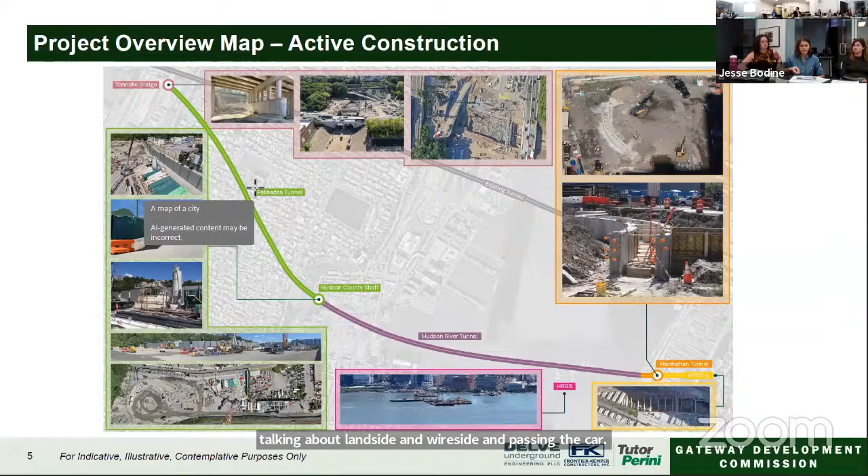The one we've been talking to you the most about is the Manhattan Tunnel Project. That's on block 675, goes across 12th Avenue and into Hudson River Park. The last time we were here was in April, and we were talking about landside and waterside impacts in the park. That's where we'll be focusing a lot, here and on 12th Avenue.

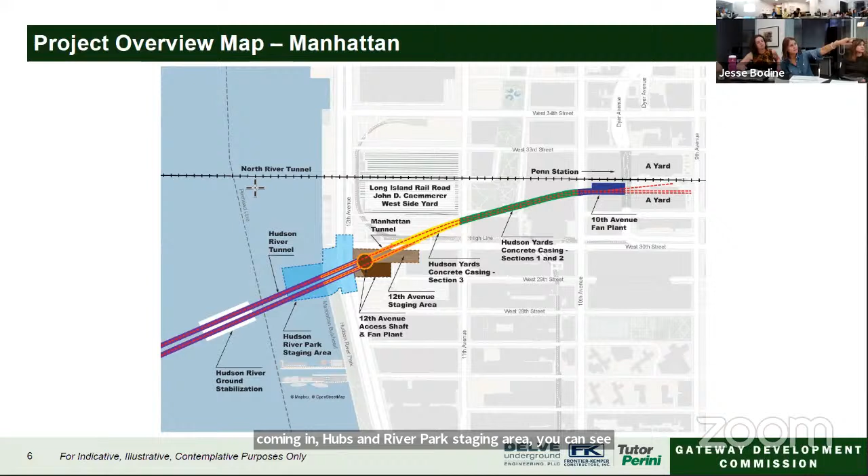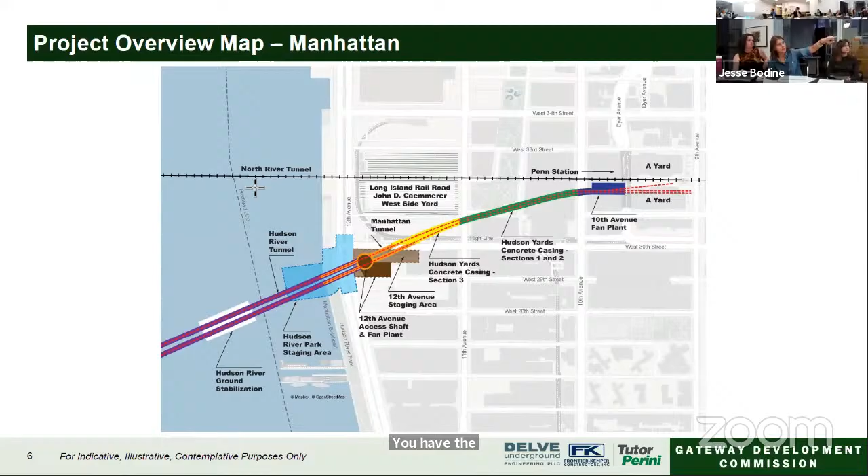This is your view of what is happening where you are. We have the Hudson River Ground Stabilization there in the water. You see the white box tracks coming in, the tunnels coming in, the Hudson River Park staging area. You can see the outline of where that is across 12th Avenue, block 675, the staging on 29th Street. You have the HYCC3 along 30th, and the Hudson Yards concrete casing, which will connect into Penn Station. Where the tunnels will go, and then 10th Avenue, the 10th Avenue fan plant — we'll have work going on there too.

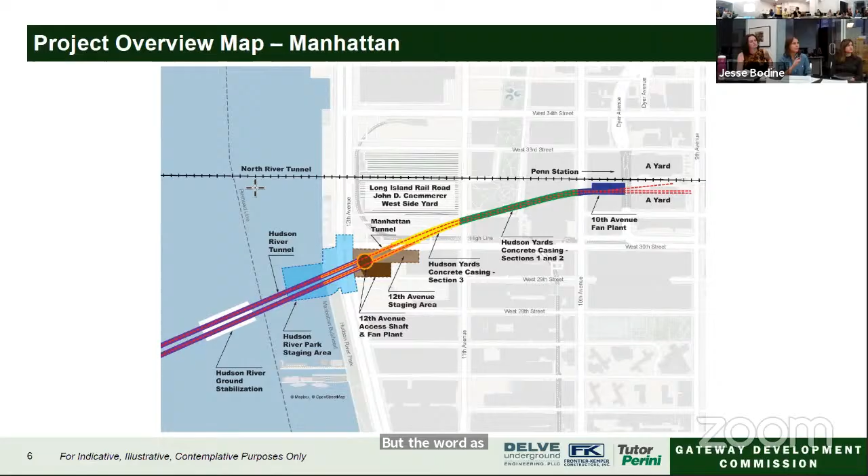A lot of you have been involved in this engagement in the past, but this gives a brief overview and timeline of where we've been discussing. We have done two 4F processes with you. This is when there are impacts within a park and the federal government wants us to do a process called 4F. We did that in 2024, and we did that again in 2025.

We've had lots of conversations with Leslie and Jesse and others about what might be some community benefits we could help build out. I think what we're expecting, Leslie, this year is maybe later on a letter from you guys asking us to run down, and then that'll be a really active conversation. I think that will take some time to get through, but we're committed to being as creative and as fun as possible.

I know you guys have a tremendous relationship with Noreen and Christine and everybody in Hudson River Park. I really cannot stress what an incredible stakeholder they have been with us. We have weekly meetings with them, sometimes more than once a week. They are incredibly generous with their expertise and time. They have been vital in providing feedback to us, and now to the contractor, about the real-life day-to-day of what that park is like. We all know how active that is.

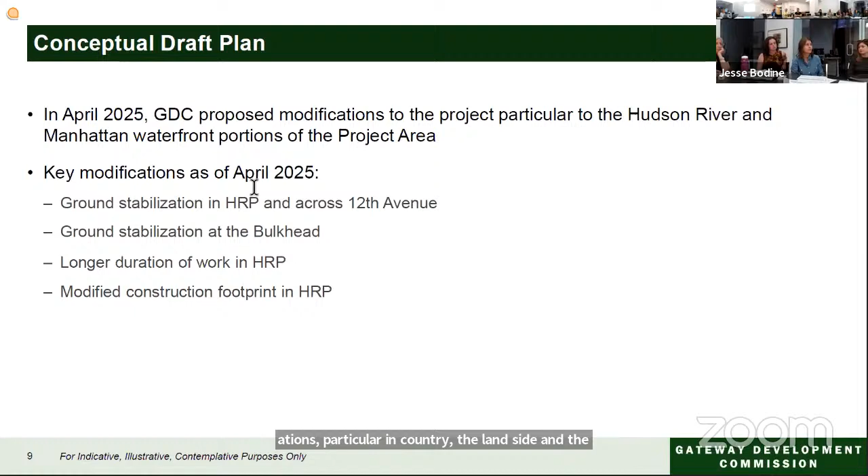What you saw in April 2025, we proposed modifications, particularly in Hudson River Park, the land side and the water side. Key modifications since April 2025 include the ground stabilization in Hudson River Park, in the park and across 12th Avenue, the ground stabilization at the bulkhead, longer duration of construction in the park, and the modified construction footprint, a bit more space. Next slide.

This is kind of the most extreme example in this slide that we went over with you in 2025. You have the bike and pedestrian path at the very edge, and you have the 12th Avenue lanes shifting sequentially. Andy is going to go into much more particulars of how some of this has changed in terms of width, spacing, and timing, but we wanted to remind you of the most extreme example we provided back in April, and we'll get into more of what has changed since then. Next slide.

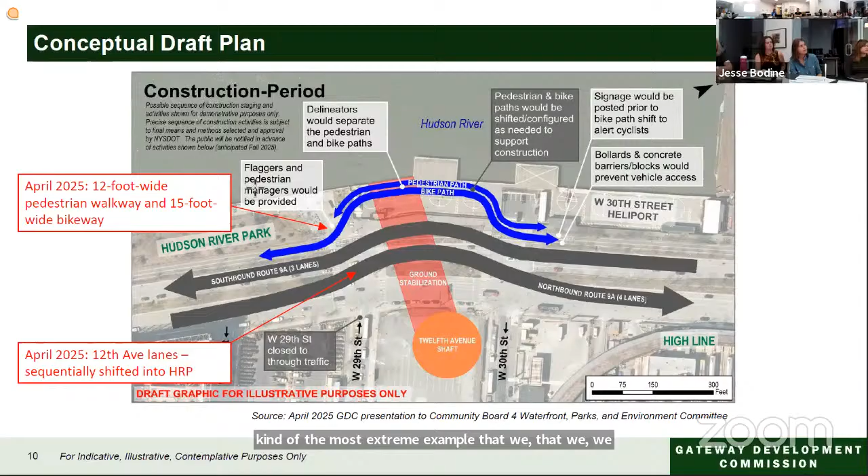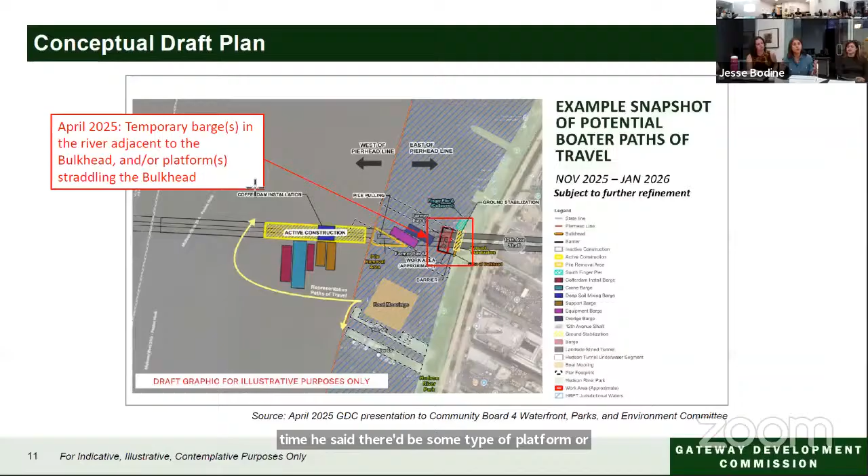Also, when it comes to the marine temporary structure that Guy is going to be talking about, at the time we said there'd be some type of platform or barge straddling the bulkhead. Now we actually have a conceptual plan, a bit more detail to show you what that will look like over the bulkhead. Next slide.

So I'm going to hand it off to Guy here. He's going to go through the marine temporary structure. Thank you for this time in the beginning, and we'll keep going.

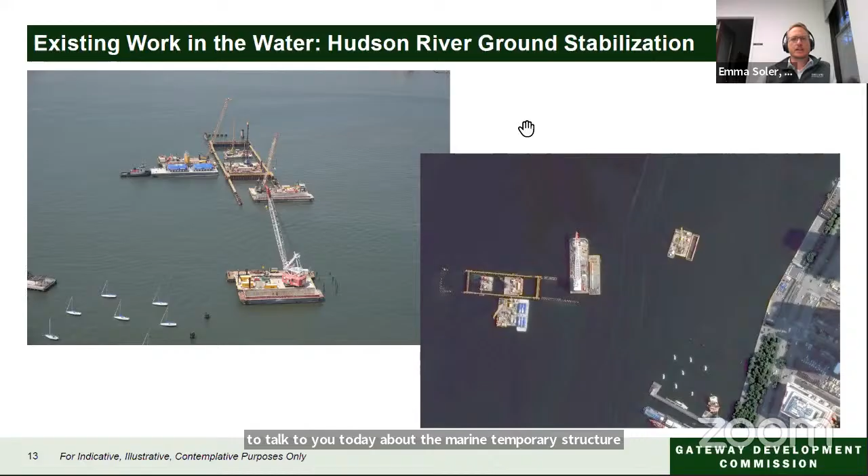Sure, thank you. Hello everyone, my name is Guy Shiba. I'm the Design Engineering Manager for Delve Underground, the designer for the design builder. I'm going to talk to you today about the marine temporary structure. If we can skip to the next slide, that will be great. Thank you for the great introduction, Emma, of the area.

GDC's contractor, which is us, as part of the design build, will install a marine temporary structure in order to facilitate the works. In this dashed blue rectangle, you can see in black the footprint of the marine temporary structure, how it will look, and we have some visualizations in the next slide.

This deck will allow for us to install pipes into the ground in order to freeze the ground under us and allow for tunneling. The area highlighted in cyan is the freeze area, the area in orange is the jet grouted area, and the green area is the shaft that we're going to excavate as part of the 12th Avenue shaft construction.

Construction has already started to pick up, and it will pick up more in Q3 and Q1 of 2026, that's the timeline. As we go into Q4 it will pick up more. The platform, the marine temporary structure, and the two chiller platforms on either side are hard to see here, you'll see it better in the next slide. They'll be in place until 2028 to allow for the operations of tunneling.

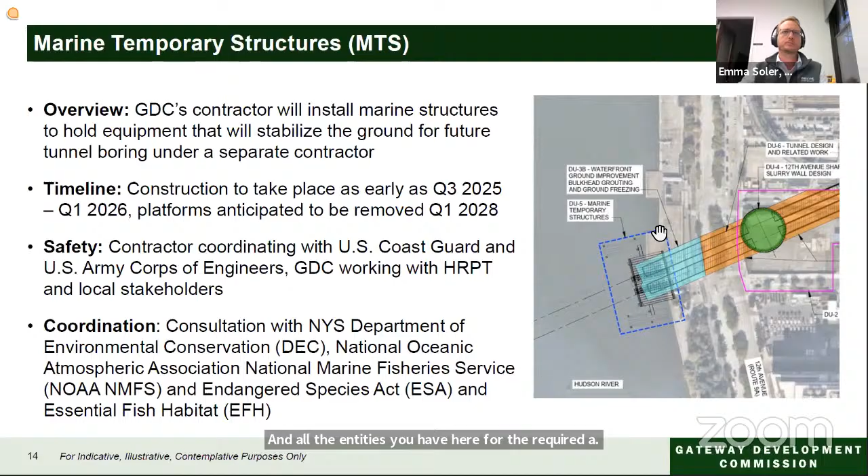Next slide please. This is a better footprint of a marine temporary structure and the two chiller platforms on either side, as well as the work area roughly in the park. Please note that these measurements are approximate and the dimensions are approximate.

The MTS, as we call it, the marine temporary structure, that's pretty well fixed. It's 120 feet, spanning, hovering over the bulkhead on one side, sitting on the ground, and on the other side sitting on what we call dolphins. You'll see it in the next slide.

And on either side we have chiller platforms that can range in dimensions as we know what will be available at the time we want to rent that equipment.

I've been told that because of July 4th, you can't rent too many marine vessels, but July 4th has passed and there's still a big problem to get marine vessels here in New York.

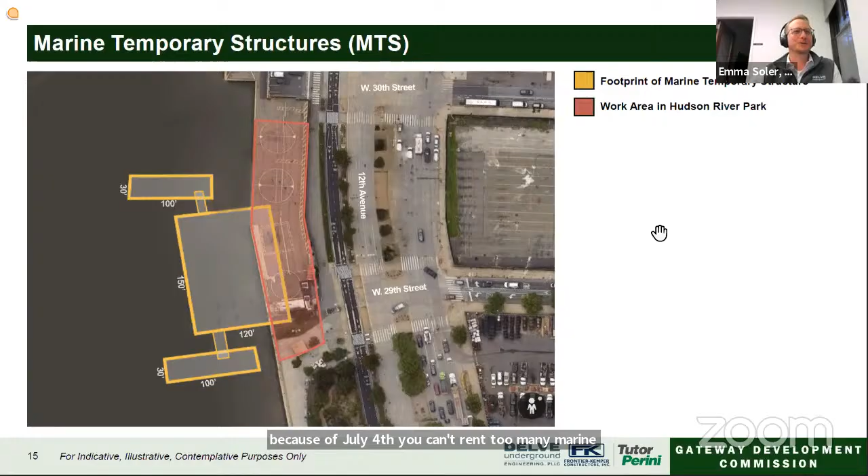Next slide please, I think this is what I've been building up for. This is a nice illustration of how it will look pretty much. You can see the dolphins on piles inside the water with a rail beam, one on the inshore and one over the river over the dolphins.

These two rail beams will both facilitate what we like to call the dance floor, which is the hatch pattern you see underneath. That will support all the freeze pipes and allow for all the operations to take place. On top of that, as an upper level, we'll have two movable bridges on which drill rigs will sit to facilitate drilling of the pipes into the ground, under the Hudson, and inside the mudline, into the clay, in order to freeze that volume in which we need to tunnel through.

On either side you can see the chiller barges, the chiller platforms. They'll be sitting there in place with gangways connecting them to the dance floor. This is where we'll locate the chillers, and we'll have manifolds running, connecting all of the freeze pipes and through the gangways going into the chiller barges, with brine circulating as a closed system in order to freeze the ground. So we don't actively insert anything into the ground other than the pipes themselves. They're a closed contained system in which the brine circulates, and that basically extracts the heat from the ground into the brine, which is then circulated and chilled back.

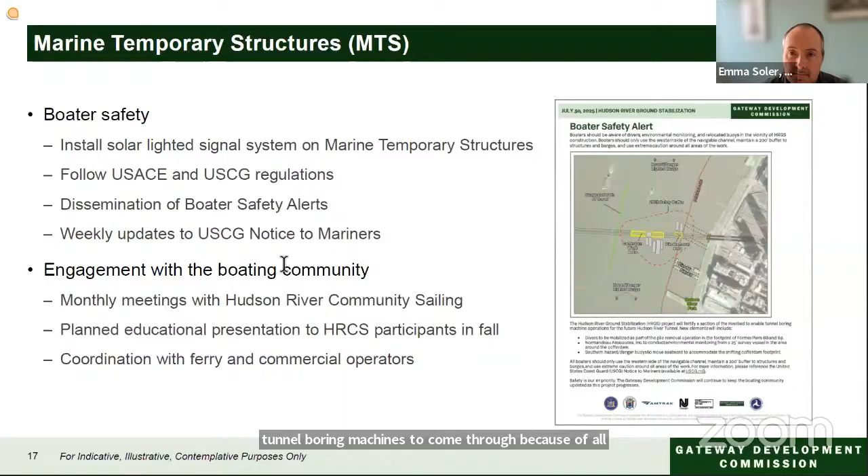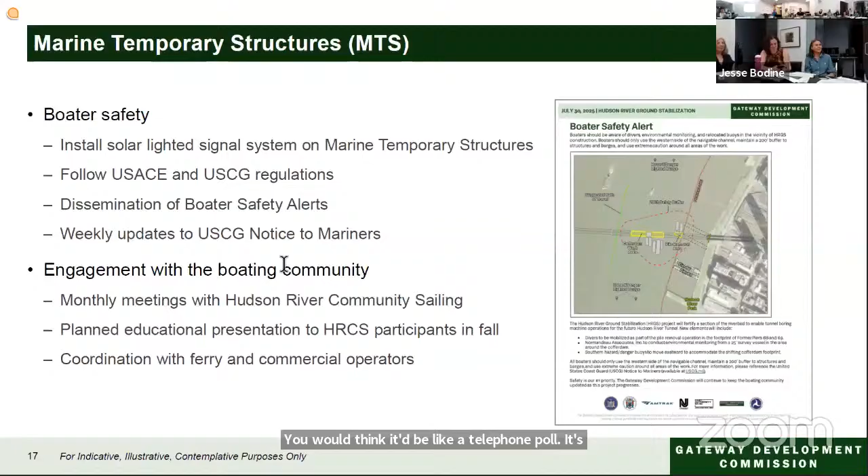We saw a pile getting pulled, like they pulled a pile that's been in there forever, and you just couldn't even believe it. It's not like you often see that, piles being pulled, and it was huge, it came out in a 25 foot piece, tall. And you just think, you would think it'd be like a telephone pole. It's really like a tree with the branches cut off, and it starts out at about 11 inches at the top, and then narrows down to about 6 to 4 inches.

So it's definitely not what you would think of a modern pier, obviously, because it was built in the 1800s. But I was just surprised that it doesn't fall apart, right? And they were saying there's no oxygen down there, so it will stay together.

I'm sorry, you had your hand up. Yeah, this is a long way from Penn Station, but is all of this work compatible with through running down the line? I think Amtrak at Penn Station is best to speak to that. We are a bi-state agency that was created to build our tunnel, and those discussions will continue, but we're focused on the packages that we have under our purview to do. But as far as whether it would be compatible with through running?

Our project is designed to work with and interact with Penn Station. As Rebecca said, through-running, Penn Station reconstruction, expansion—any of those things—are not part of our legislation. But we're making sure we can connect to Penn Station and operate in that environment. Whatever happens within Penn Station is for others to decide. What we're doing is providing this resiliency project, so whatever is decided with Penn Station, the new tunnel and the rehabbed North River Tunnel will be able to serve the public. I hope so—maybe a lot of TBD there.

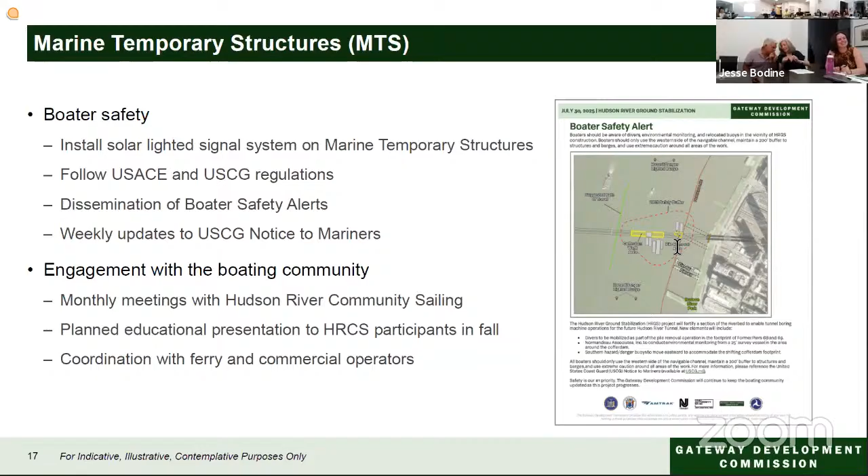I'm going to jump in and speak about the bike lane and pedestrian paths. Hey, Andy, could you introduce yourself real quick, just as a reminder of who you are? That's Emma Soler—yeah, we don't have three Emma Solers. This is the real one. I was going to introduce myself as Emma Soler. Okay, gosh, all right, you called my bluff.

No, I'm Andy Mankey. I'm with Delve Underground. We're the lead designer for the design-build team working with Frontier Kemper, and I'm the civil engineer on the job, so definitely intimately involved with a lot of the topics we're going to talk about next in terms of the bike-ped lane shifts and the roadway shifts.

I'm going to start with the ped and bike lane adjustments. Up on the screen is a series of stages of how we plan to implement them. We'll go into details in the next few slides, but this gives context of when these stages will be implemented. Stage 1 is a pretty minimal impact, but Stage 2 is the first time we have a bigger impact, and that's currently targeted for Q1.

Getting out and talking with folks a little more and getting input allows us to take that input and implement it. In addition to speaking to this group tonight, we've been coordinating with a number of other stakeholders on the screen, including both the DOTs as well as HRPT, providing input along the way, including lessons learned from agencies dealing with detours in this area over the years. The final bullet is about the trees—there's a pretty short stint of tree removal along this corridor, both within the center median of 12th and the portion of the bikeway that aligns 12th.

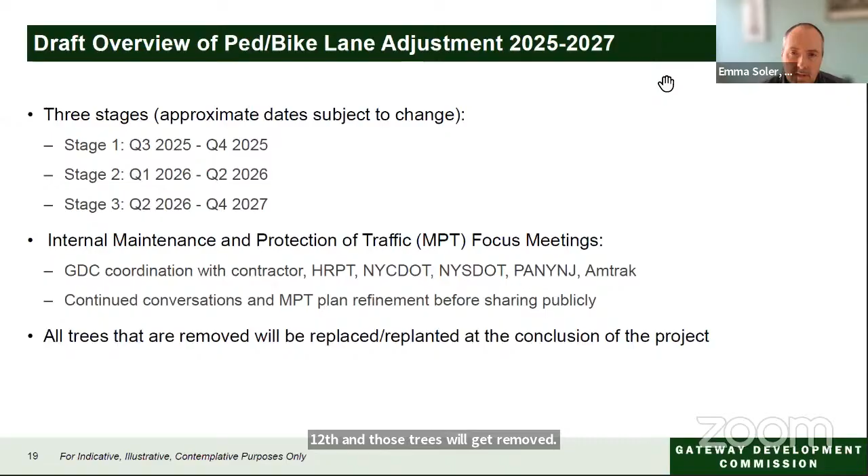Next slide. If I can ask—I know we talked about this, and we wrote this in our letter—about just access points and length of time. Has it changed since then, or is this pretty much the same plan? Are there any big changes here we should know about? The plan has changed.

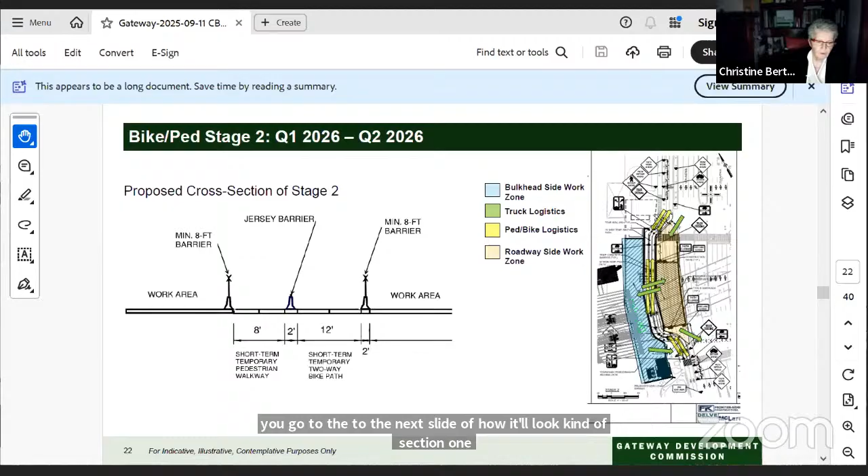The one thing I'd point out is that with a lot of the turns and things like that, we'll have delineators. If you go to the next slide of how it'll look section-wise... can you stay on that for one second? Go back to the other one. So what is happening in this stripe section to the right?

That is the limits of the ground improvement zone. So you're talking about within that roadway side work, the beige color where it's more striped - yes, that's where they're going to have drill rigs installing freeze pipes into the ground.

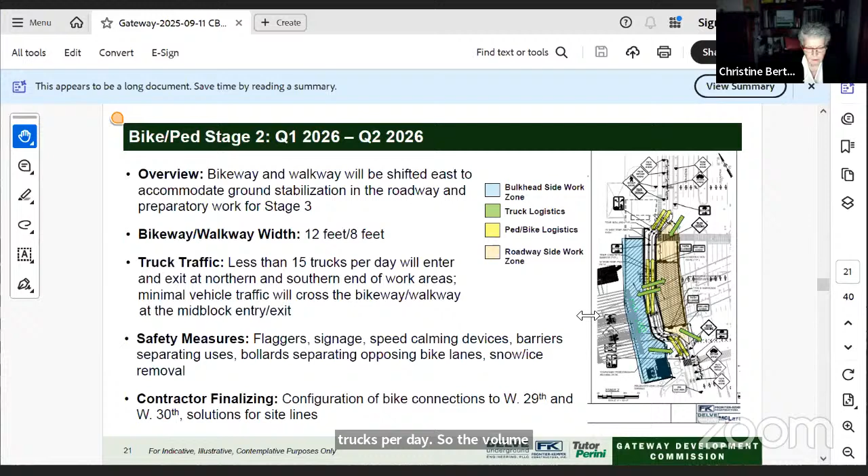I see. And then the volume - you say less than 15 trucks per day. So the volume, that includes the back and forth in the middle? Yeah, so one of the nice things is that because of the marine temporary structure out there, there'll be a crane on that as well as a crane on the land side, the blue area. We're going to look to barge a lot of equipment in, and that's going to reduce a lot of the truck traffic going on in this area.

So what is the volume that is going to go back and forth between the two zones? Oh, I'm sorry - the back and forth between the two zones would be 2 to 3 trucks every other night type thing, in the blue zone. If you go back a step, so everybody can get the idea - when you're in stage 1, you're installing a lot of the pipes in that zone during that period of time, and you ultimately create a bifurcated site a little bit, because you've got all these freeze pipes that come above grade.

So it's more for just the occasional pickup truck to go over and pick something up or move something around - things like that. It's a very low frequency, but I want to make sure people are aware of it so that when they hear about it or there are concerns about it, we can take those into consideration as we set up our crossing.

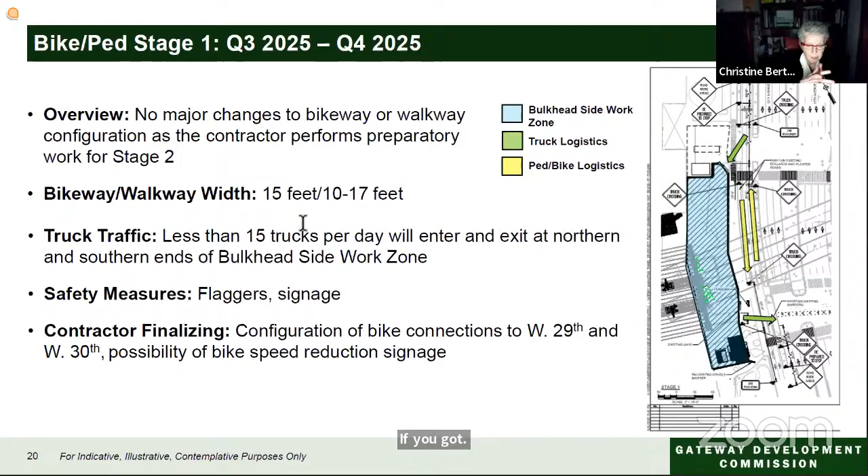So we can go back to stage 2, going forward a slide. You said the beige is going to be in the roadway, meaning it's going to go all the way to the median. Yeah, so this area is just for the freeze pipe and how we move peds and bikes around. The roadway part will be the next set of slides, and I'll show you how we dance through the roadway portion.

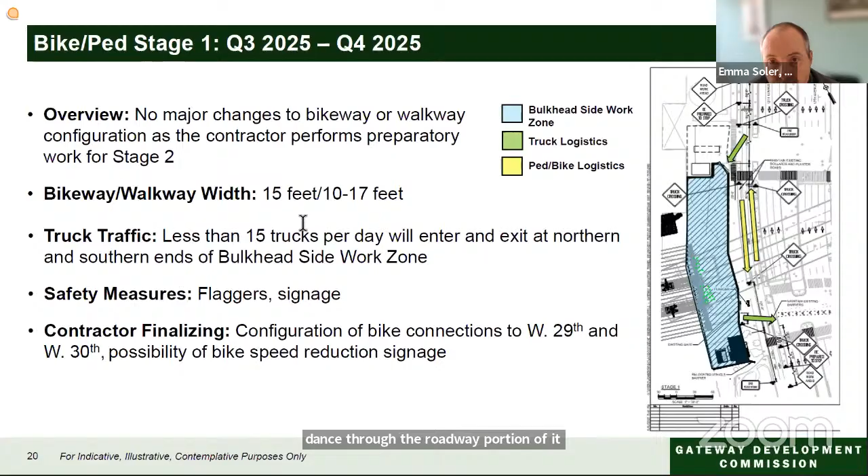Okay, go one more slide. Here's the general cross section of what the bike and ped lane would look like during this short-term duration. We'll have a Jersey barrier to separate the peds and cyclists, and through feedback with our partners, there'll be flex stick delineators between the two bike lanes. We understand there's a lot of bad biking behavior with people wanting to pass slow cyclists, so in these curved areas we're going to set up delineators on tight spacing to mitigate that, as well as appropriate signage.

That's the general high-level concept for stage 2. The roadway side work zone, at that point, could be right up against that work zone or out in the middle of the street. It's completely independent of these shifts in terms of they're not interlinked.

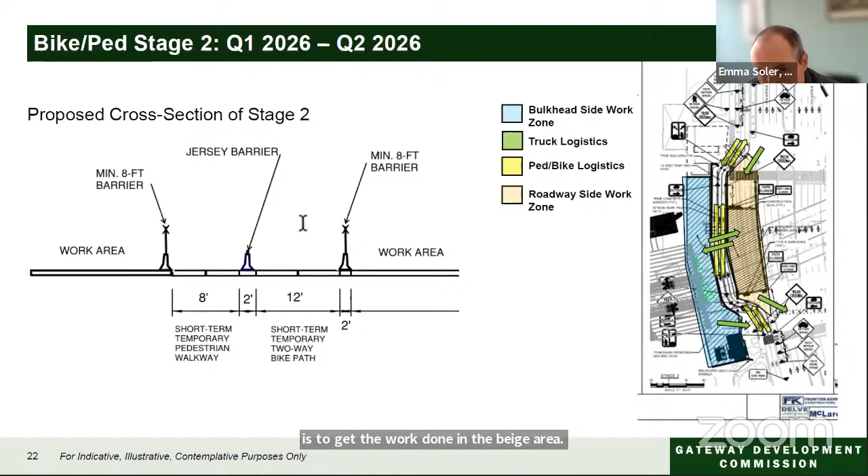The reason this is short term is the goal is to get the work done in the beige area. If you go to the next slide, stage 3 is the long-term condition we'd implement for the duration of the freezing and tunneling. The idea is we want to get our peds and cyclists back into their original corridor, and that's what we're able to accomplish with the shorter duration tight turn sweeps, getting them back to this condition.

The big hang up is that due to the freeze pipes that have to be installed over the tunnel to create the competent material for our tunnel to go through, the freeze pipes have to extend above grade and have a manifold and brine pipes that interconnect to run the solution down to freeze the ground. To do that, you can't put pedestrians and bikes at grade, so there's a slight ramp that goes up approximately 2 feet, 24 inches, over about 40 feet so we can remain ADA compliant. That's done on either side of the ground improvement area and comes back down to grade on either side.

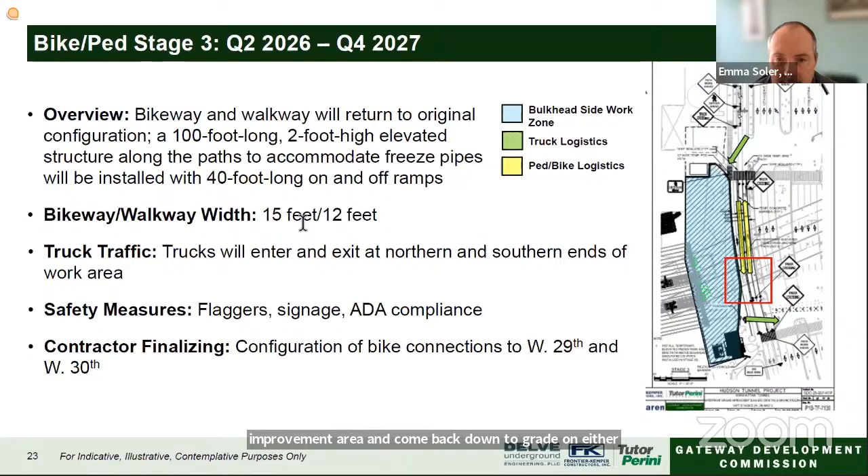If you go to the next slide, it gives you a general idea. This is the 24-inch lift, which is the maximum height, right over those freeze pipes. I did my best with my Bluebeam sketching, but the red lines are the freeze pipes. The curb along 12th doesn't get disturbed and will be there throughout the life of the project - it's a 20-inch high curb. So that gives you some general context.

At the bottom of this figure, this shows a 6-foot high cyclist going over this 2-foot high ramp, just to give an idea. You've got 40 feet up, then flat for 100 feet over the freeze zone where the pipes are, and 40 feet back down on the other side. That is the bike and pedestrian shifts. I can stop and take questions now, or we could keep going to the roadway shifts.

We have some questions in the room, if that's okay. Yeah, fire away. Wouldn't you need kind of a longer ramp approach to maintain a 5% pitch so it's not

A ramp for people in wheelchairs? Yeah, so it's laid out so that it's like 4.75, and so at 5% you can't go more than 24 inches. Unless, once you go above 24 inches, you need a stop, like a landing, for them to rest to then go additional height. And so that's why the 2 feet over the 40 feet gives you that 5%. So the math, if you went right with 5%, you'd just need 40 feet, but it'll be a little bit longer just because I never trust everybody to build it perfectly.

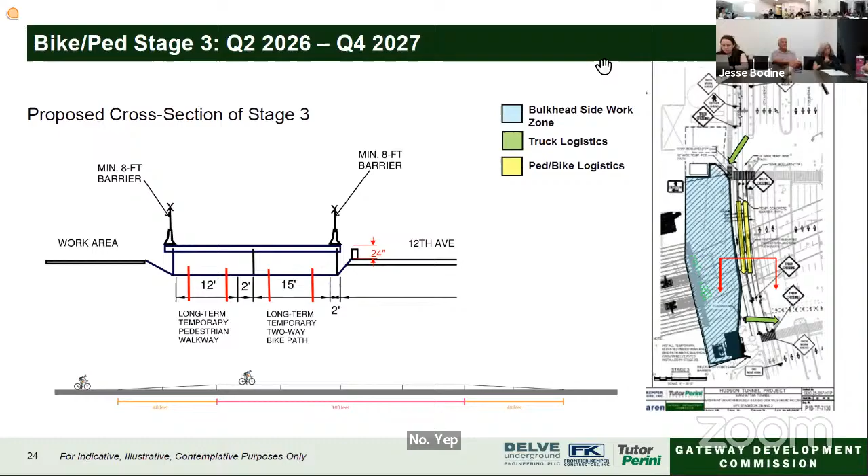Great, I think you can move on. Okay, great, yeah, let's get into the next phase.

Before we get to that, I want to take one moment on how we get the rebuilt bike path to our final condition. So if you can imagine, when we're working in this stage 3, eventually we'll need to reestablish the bike path, and what we'll do is basically shift the bike path in a similar manner to what we did in stage 2 to create what would be stage 4.

We would then be able to go into the existing bike area, restore that whole condition, and turn it back over to the public. They would have their permanent condition. Then we'd go to what would be stage 5, and we'd clean up the rest of the heliport and be able to give everybody back basically what they started with.

That's the goal. That's been a question people have asked - how are you going to get it rebuilt? So wanted to touch on that one. All right, next one.

All right, so this is the 12th Avenue lane shifts. Go to the next slide.

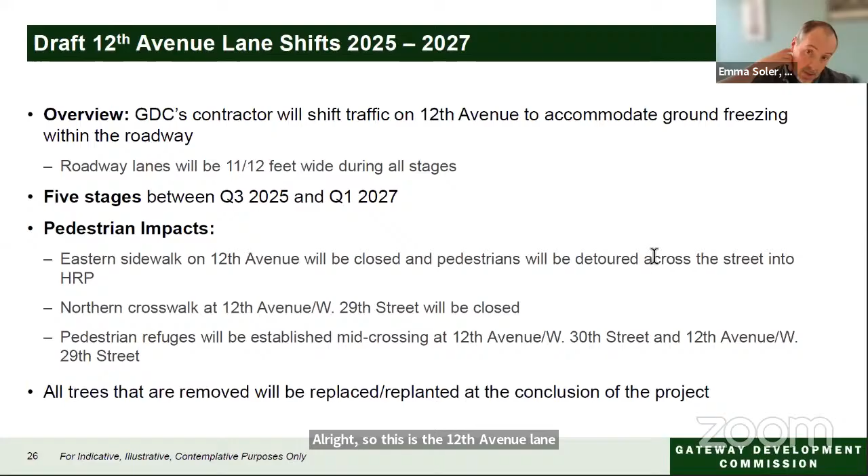So basically, over the next couple of years - we talked a little bit about the parks because that's where the ground freezing is going on. That has unique challenges with ground improvement, using jet grout, which needs to be installed from the surface. It's basically jetted into the ground to improve the ground down there, and to do that, you need to be as best you can vertically over the work zone.

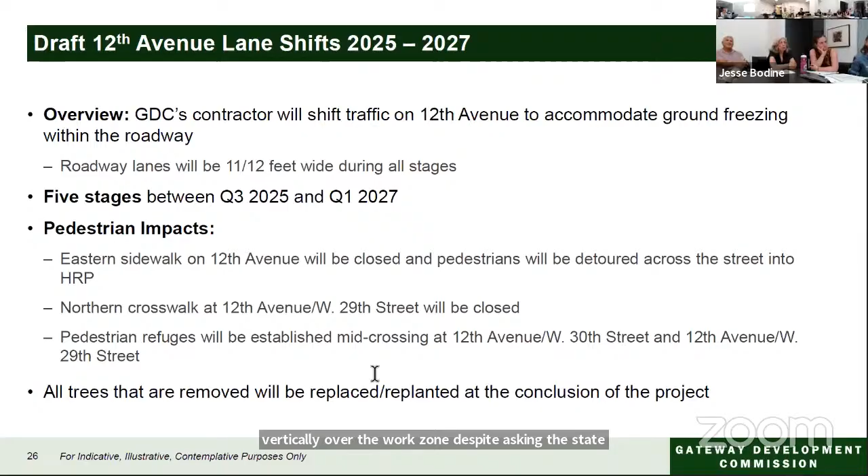Despite asking the state if I could close down all 7 lanes of traffic, they said no. I was a little disappointed in that response, but as a result, if you've been in the area recently, we're working on removing the center median, and the center median removal allows us to create what my Minnesotan in me loves to call the ice rink.

So affectionately, you're just from curb to curb - you've got a flat asphalt or concrete driving surface, depending on where the work zones are, and to get across the lanes, you'll move those lanes around to create the work zones.

But as a result, we are going to be closing the eastern sidewalk on 12th that runs along the shaft. In addition, the northern crosswalk that crosses from along 29th that crosses 12th.

The northern sidewalk isn't that big of a deal since we've already closed that sidewalk going back to 29th. For those familiar with that, it's already been implemented out there, so this is just a continuation of that closed sidewalk. But for the eastern one, we did studies to ensure the pedestrian volumes were minimal, which they are.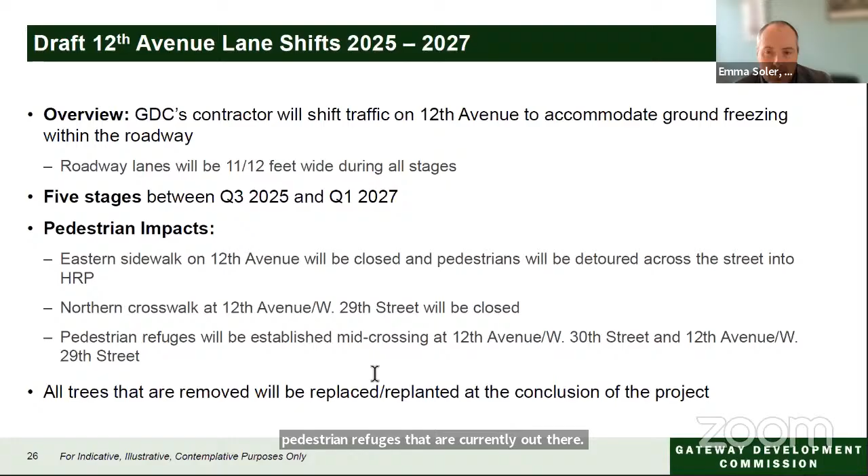In theory, it's not that large of an impact, but I'm happy to hear from folks. The pedestrian refuges currently out there will be maintained as we bounce around. I mentioned the trees earlier. So with that, we can jump to stage 1 to give you a visual depiction of how this will look. Next slide, please.

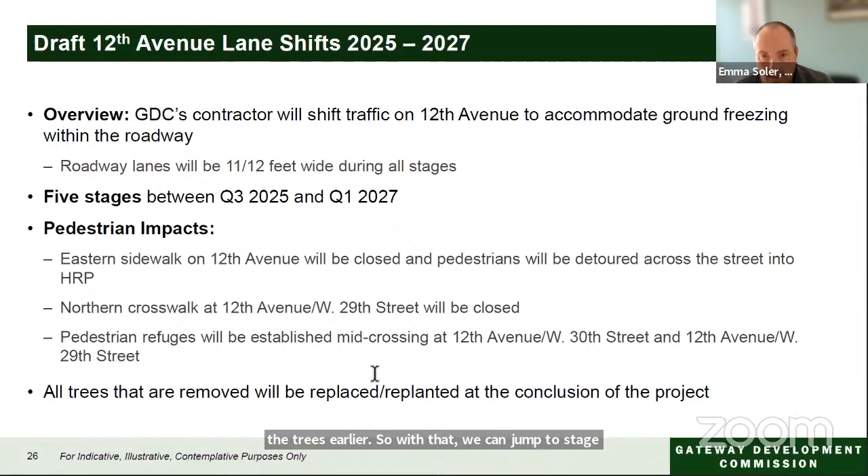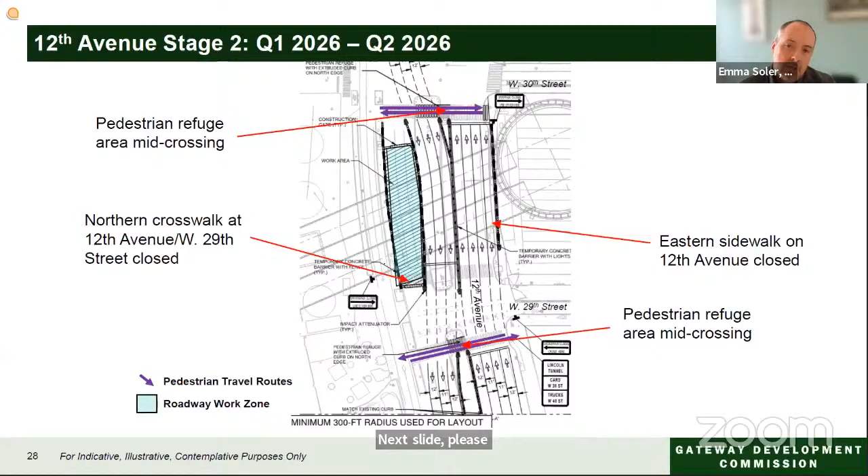When we jump to the other side of the street, we shove everything back to the east and reestablish the 4 lanes northbound and 3 lanes southbound.

I'm losing my voice, I need my water. I ran out, sorry.

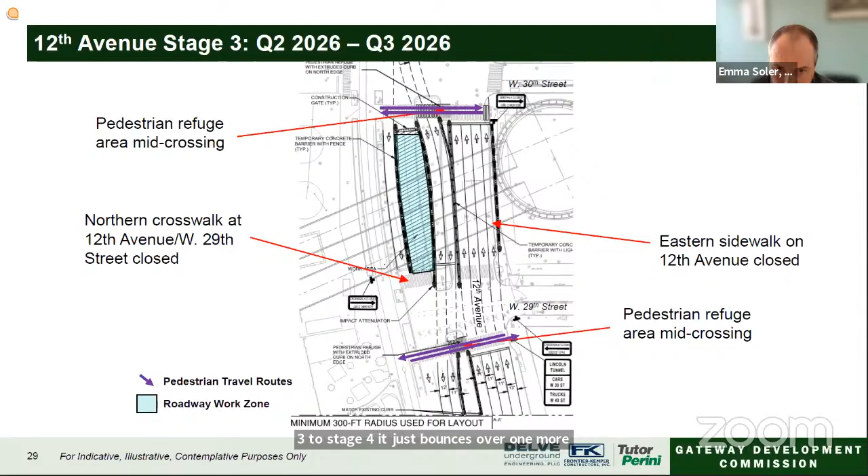As we move across the road, basically all we're doing is shifting lanes back and moving our work zone to the east. So when you go from stage 2 to stage 3, next slide, you can just see it slide over. Then you go from stage 3 to stage 4, it just bounces over. One more slide, please. And from stage 4 to stage 5, we'll bounce one more slide, please.

Now, during this operation, we've talked internally—with all construction jobs, there may be a need to not move 2 lanes at once, and we'll only move 1. We've been trying to sleuth out the what-ifs of the condition. So when I talk about these 5 stages, it may be 4, it may be 6, but the concept will remain the same: we'll get that first stage set up, establish the second one, and then work our way across the roadway.

So that is what I had to share, but I'm sure my friends Rebecca, Emma, and Laura will tell me what I forgot to share, but maybe not.

That was pretty good, I think, yeah. You're an expert, Andy. You shared all the secrets, Andy. All right, good job, thank you.

Are there any questions in the room about 12th Avenue and shifting? When the lanes shift over, going between stages, do they close down 12th Avenue for a couple hours period?

I don't know, Andy? Yeah, so how it works is you basically do the jet grout work in that work zone, right, and that will displace—you'll have to take some of that concrete pavement out, things like that. You'll finish doing the jet grout work, then you're going to pave over it with asphalt. You're going to come back with the asphalt, and then you're ready to reestablish the lane.

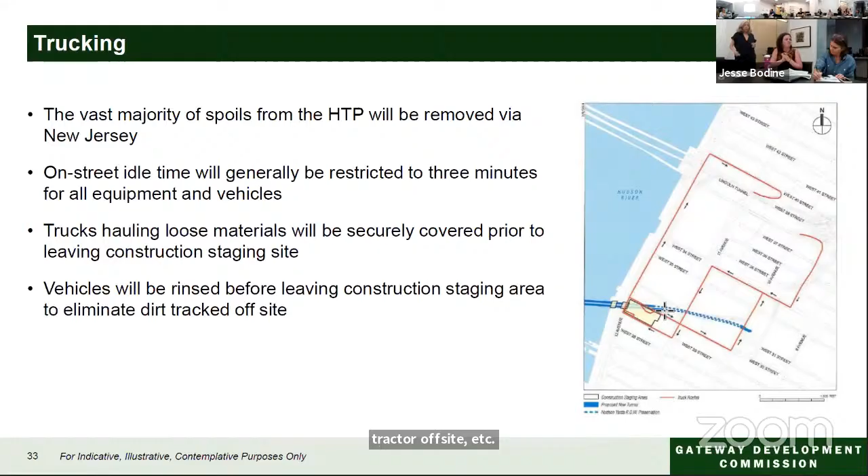And in terms of environmental mitigations, we have a whole environmental team, of which Ben Engel, who's on the line, is sort of the head, the expert environmental planner of our team. But yeah, we have a number of different plans in place in case of spills, in case of emergencies, or other things that can happen on construction sites but can't always be anticipated.

We're monitoring for noise, vibration, and air. We have a wastewater management plan in place, and there's also a complaint procedure if folks in the neighborhood or that live nearby are having an issue or notice something that seems off. There will be more information about that later in the steps, but there's a way for folks to reach out to us and say, hey, I think something's not right, and we can respond and check our monitors, etc. Next slide.

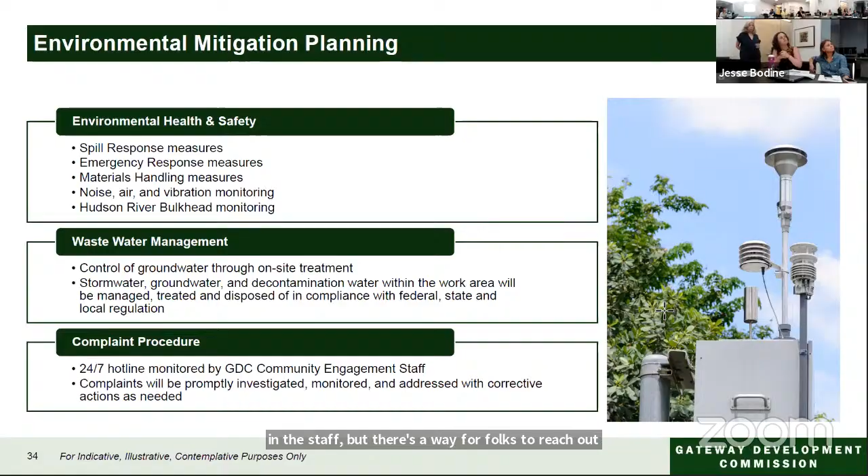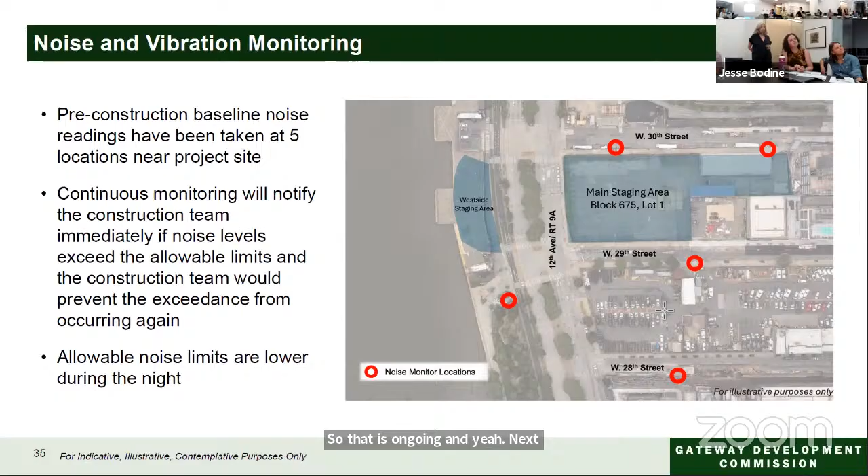And I guess I'll just keep going through this, and then if there's questions about environmental monitoring or engagement, we can take them at the end. So next slide, Janine.

Obviously, we know that Hudson River Park is really heavily used, so it's important that we talk to a lot of folks about what's going on, both in meetings like this and with the general public. There's a lot of different uses of the park - walkers, cyclists, tourists, our construction crew - so the safety of everyone is of the utmost importance.

Just to walk you guys through some of the engagement we're doing right now: as previously mentioned, on Tuesday we presented to the Hudson River Park Advisory Council. Today we're at Community Board 4. We also have a regular monthly Manhattan Construction Task Force, which includes all the relevant elected officials, CB4, Hudson River Park Trust, Friends of the High Line, and a number of other stakeholders, and we'll be sharing the same deck with that group later this month.

And then we have ongoing public outreach. We distribute construction notices regularly, talk to the press, use social media, and continue talking with all of you. In particular, we are doing targeted outreach to the cycling community, of which I am personally a member, so it's interesting to me.

We can go to the next slide and talk a little more about that. We know that cyclists are very engaged in their mode of transportation - I can personally attest to that. We want to make sure folks know what's going to be going on so they can plan routes accordingly and be safe. There's people commuting on this path, people exercising and getting their workout in, and there's also deliveristas - it's a very complex place.

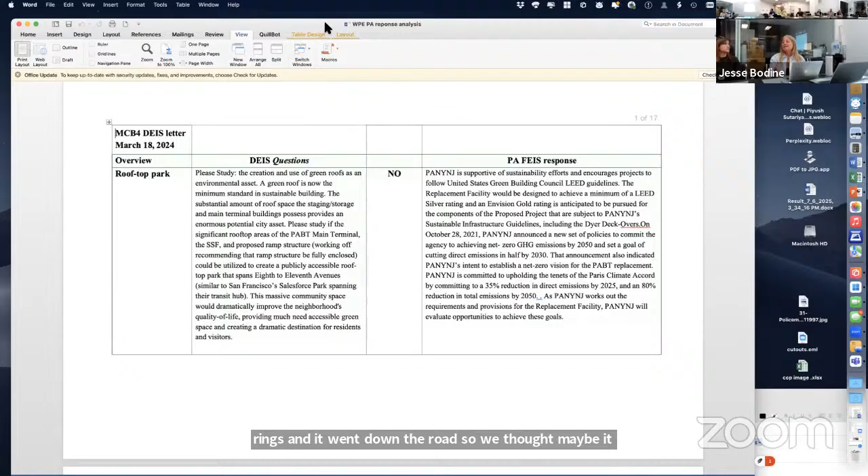And the genesis of this was when Port Authority came to our meeting a few months ago. It was about, if you guys remember, I don't know if it was before the newer members. They were talking about the park space and some of the designs of the park space and the air shaft. Then it got into bathrooms, then rings, and it went down the road, so we thought maybe it would be a good idea to have a representative from the working group come and say, listen, this is what we know, these are the WPE asks.

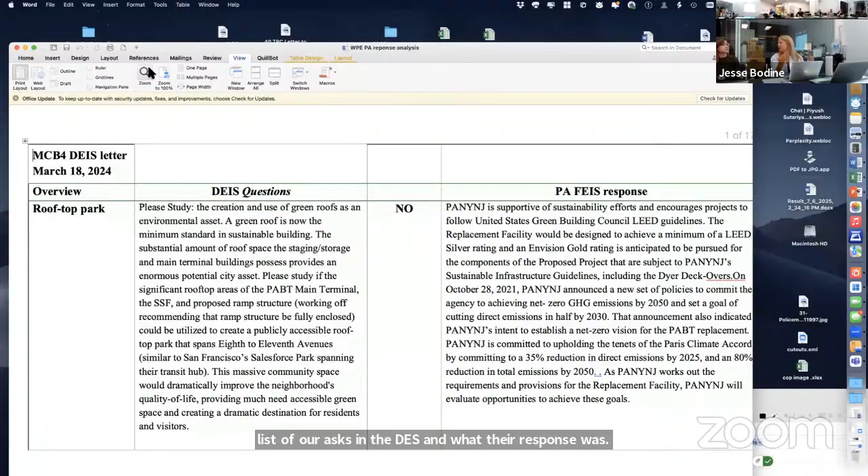This is what we were told yes on, this is what we were told no on, so I think it'd just be helpful for this group to hear, kind of be brought up to speed on where we're at, what we have to work towards. We could keep writing letters to them about what we want, but Christine really drafted this awesome list of our asks in the DEIS and what their response was. This will also form our asks moving forward with them as well. So, Christine, do you want to take over?

Yeah, I will. What I want to do is 180%. I want to make it as big as possible. Is it possible at some point to put it in the Dropbox? It isn't now. Okay, it's in there now.

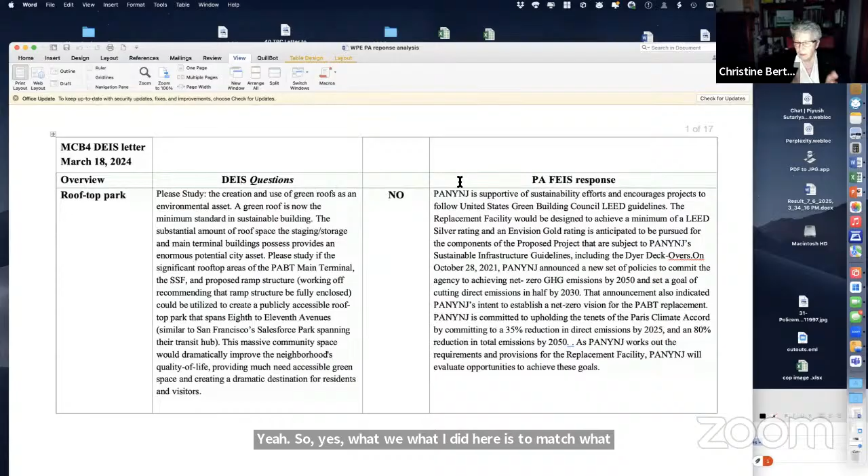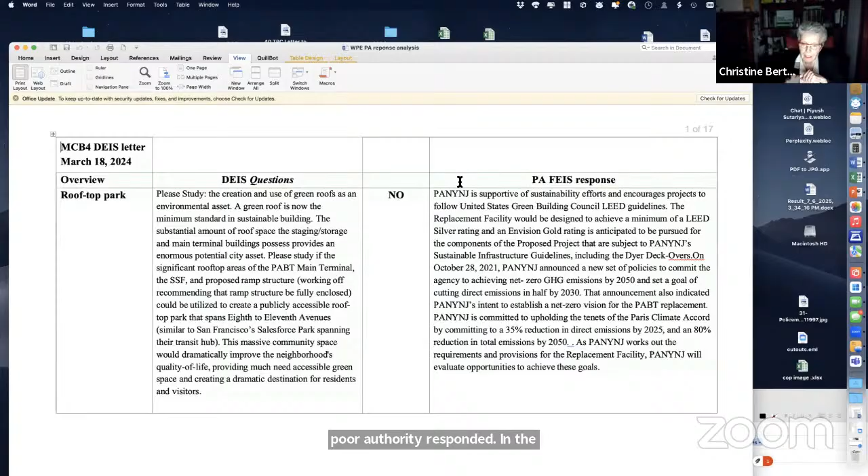So yes, what I did here is to match what — there was a letter on March 18 from CB4, which really took in all the recommendations from WPE and put it into the comments to the DEIS. And then the Port Authority responded in the FEIS line by line to each of those comments. And I thought I would go through that so that you can see what they said for each of the comments of WPE.

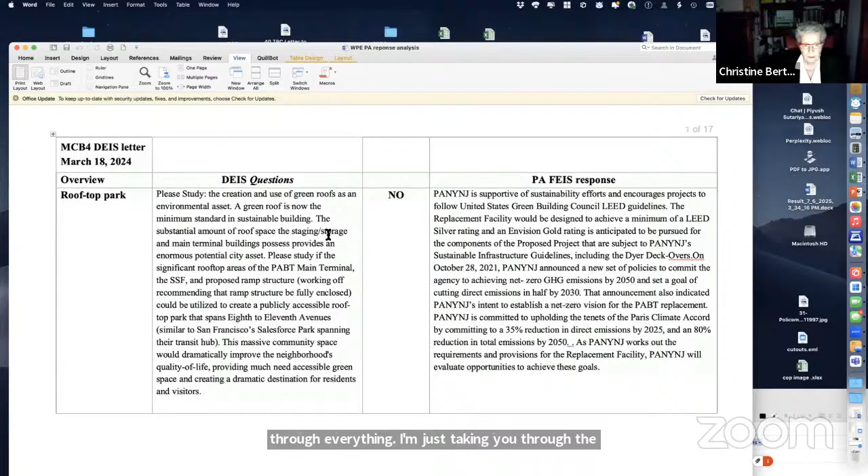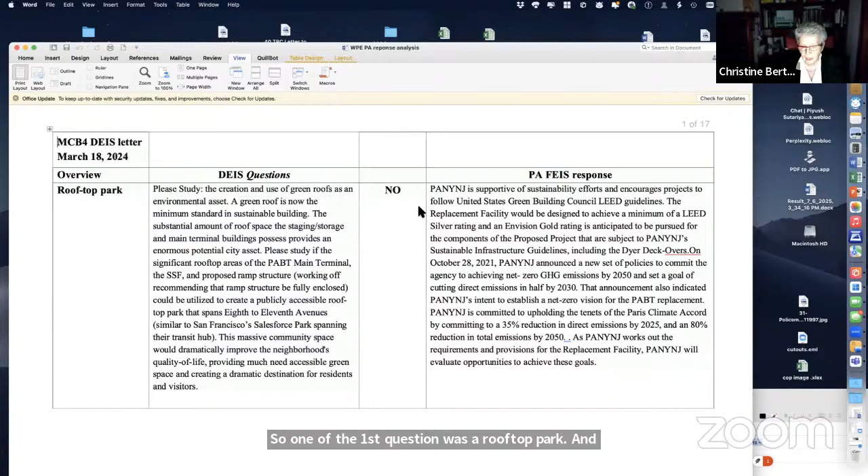I'm just taking you through the WPE asks. So one of the first questions was a rooftop park. Essentially, the FEIS said no, we're not going to do that. The reason was essentially for money, and because they are going to create another park, which is on the deck overs, so that would have been an additional park and that was probably beyond the budget.

The extending the deck over 9th to 10th Avenue, they responded no to that. The deck between 38 and 39 was curtailed because of tolling station, and therefore they had to leave that portion up open to the sky. So they said they are not going to do that, and indeed the decking is also very expensive — staging a deck over to support the park, to structurally support a public open green space with full-grown trees and planting.

On this they said yes, they have committed to that. And in the POA, the point of agreement, we'll see further that it has been expanded on. So there definitely is a park on the deck overs from 37 to 39. You had asked for a community-based process, and they have committed to have a community-based process, which is very good.

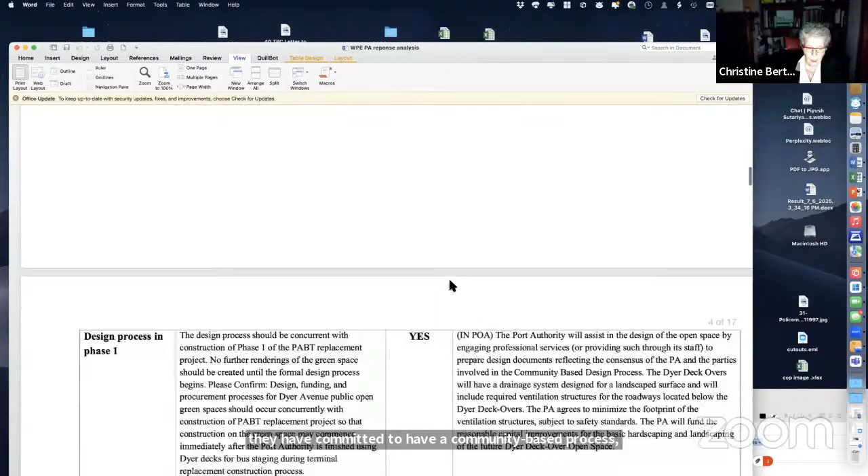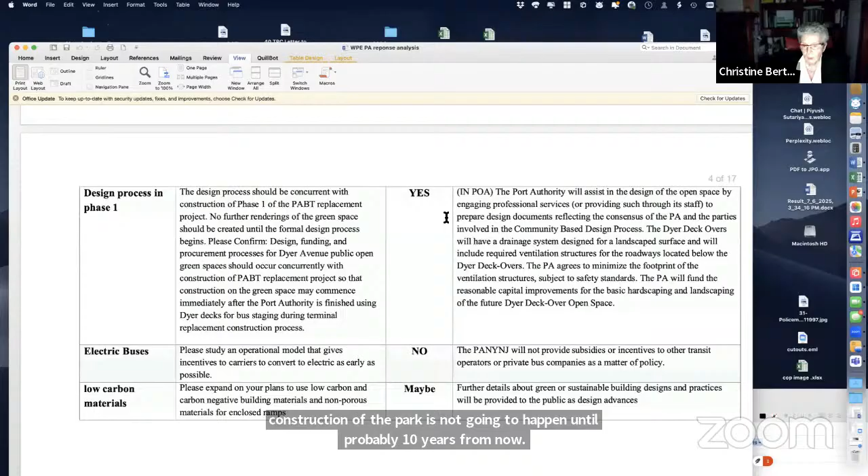We had asked that the design take place in phase 1, which is starting next year, and even though the construction of the park is not going to happen until probably 10 years from now, they have agreed to that. So next year we'll have a whole group starting, including CB4 and others, to design the park.

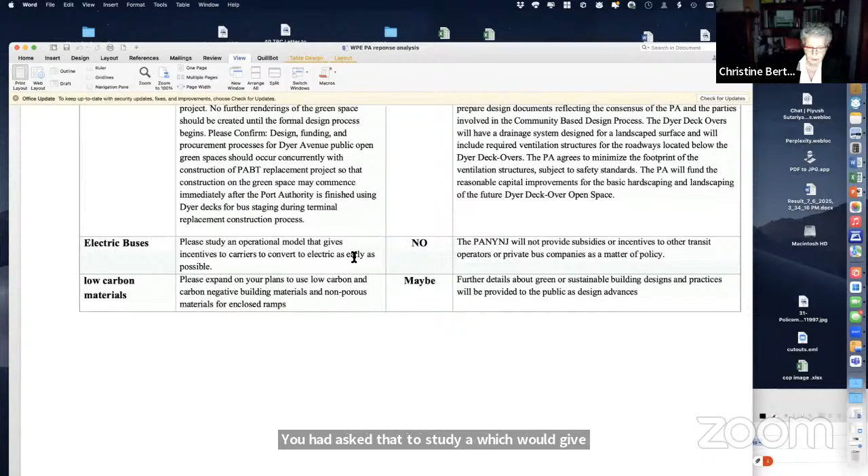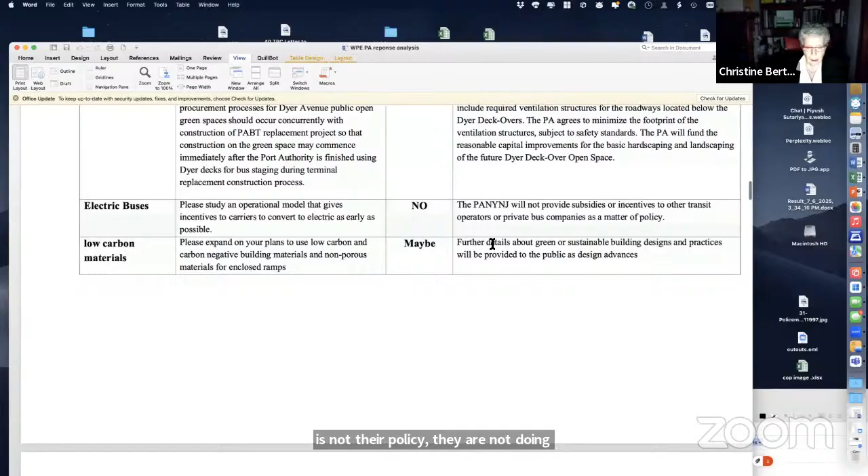You had asked to study a model which would give incentives to carriers to convert to electric — bus carriers, right? And they said that this is not their policy; they are not doing subsidies or incentives. The next question was low carbon materials.

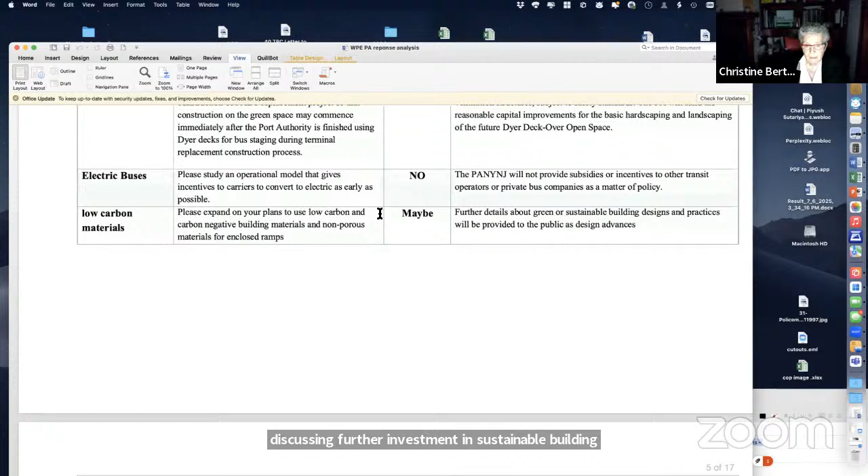Their answer was ambiguous, and it said they will be discussing further investment in sustainable building and practice. And when I say maybe, what I mean is that now it will be the time to go and push for that and say, what are you going to do about that? But they didn't want to commit to that in the FEIS.

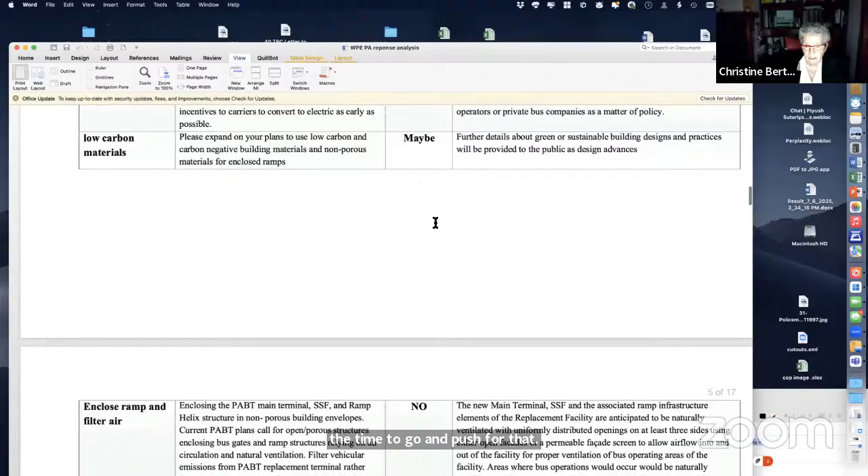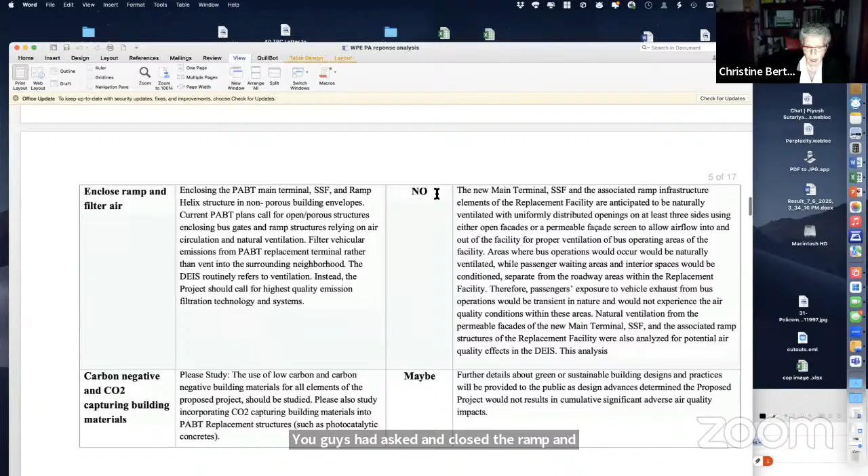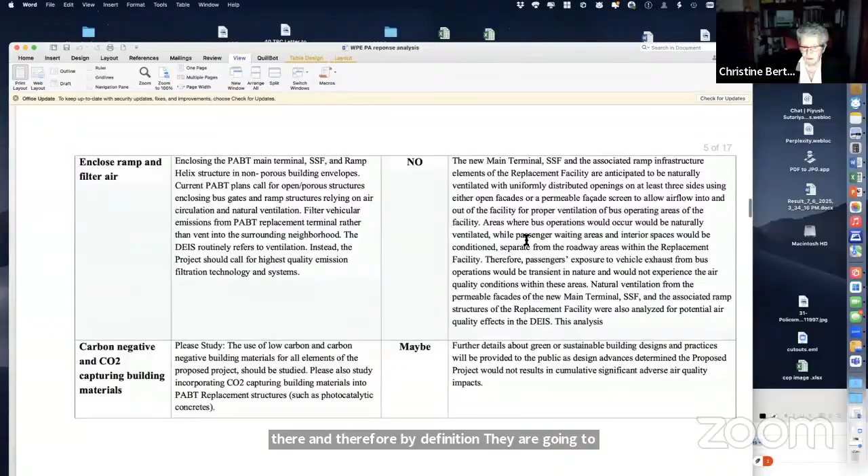You guys had asked to close the ramp and filter the air, and the answer is no. Because the ramps — because they figure that the buses are going to become electric, they are equipping the whole terminal so that buses can recharge there. And therefore, by definition, they are going to reduce tremendously the amount of bad air quality, and therefore they don't have to do an enclosure to take care of it.

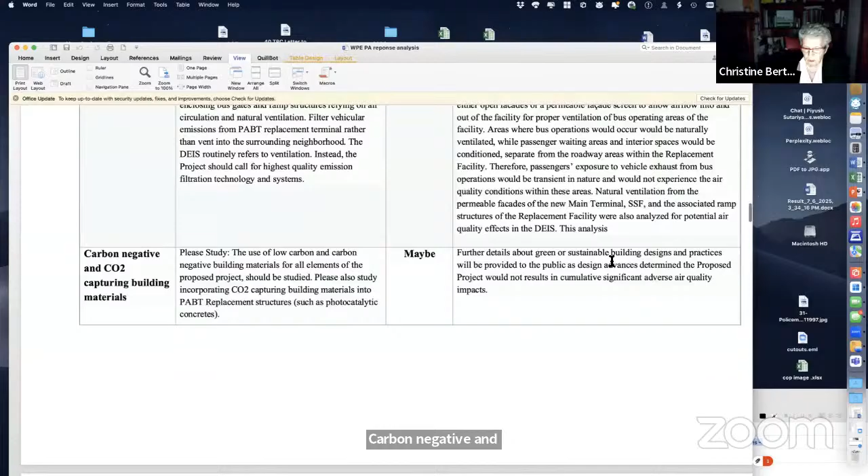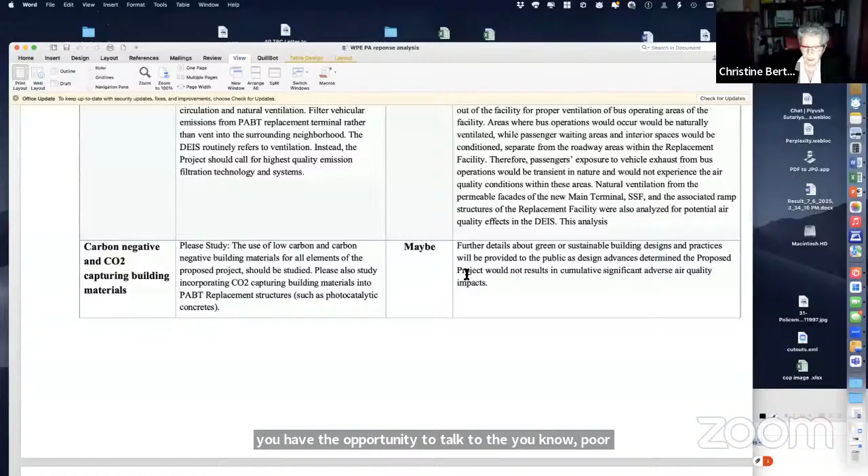Carbon negative and CO2, same answer as above. Further details will be done. And I think you have the opportunity to talk to the Port Authority environmental group and really discuss with them what they are going to do and maybe push them into doing more.

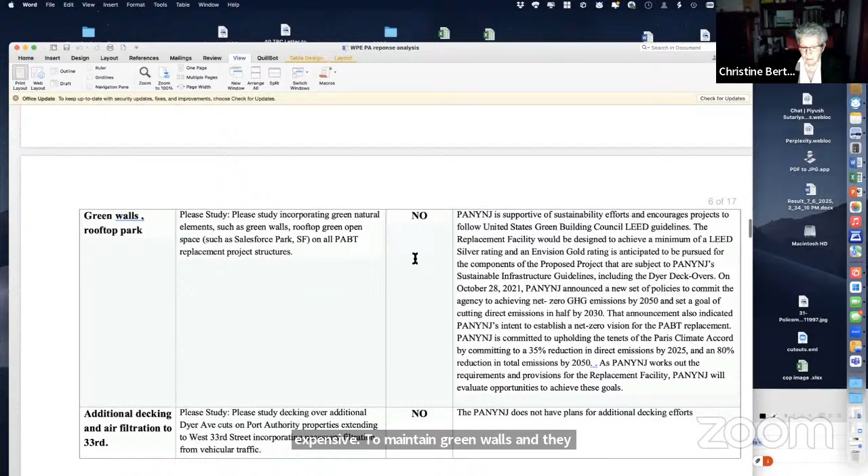Green walls and rooftop parks. Again, the rooftop park, they already said no. And green walls, they told us that it was very, very expensive to maintain, and they had a tendency to really be difficult to maintain. Therefore, they would not want to do that because the maintenance would be too high.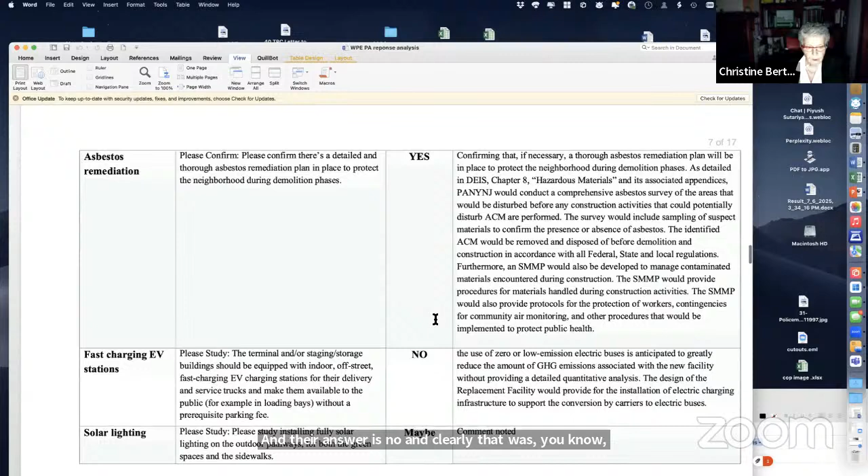Okay, asbestos remediation, the answer was yes. You can read obviously all the details on the right side, but essentially they said yes, we're doing that.

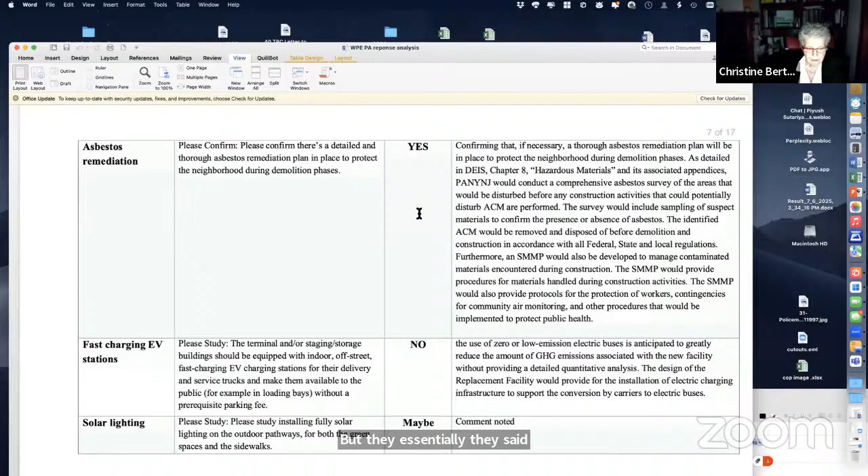Fast charging EV station for individual cars. You should know that there is no parking area in this project. There is none. So their view is that they were going to work on buses because their mission is the buses and low emission and charging of the buses, but they would not include low charging for cars.

Solar lighting, I think it says maybe, because when they say comment noted, that means that they want to take it back. So that's good.

Bird-friendly glass, they said yes. Tree canopy, yes to the tree canopy.

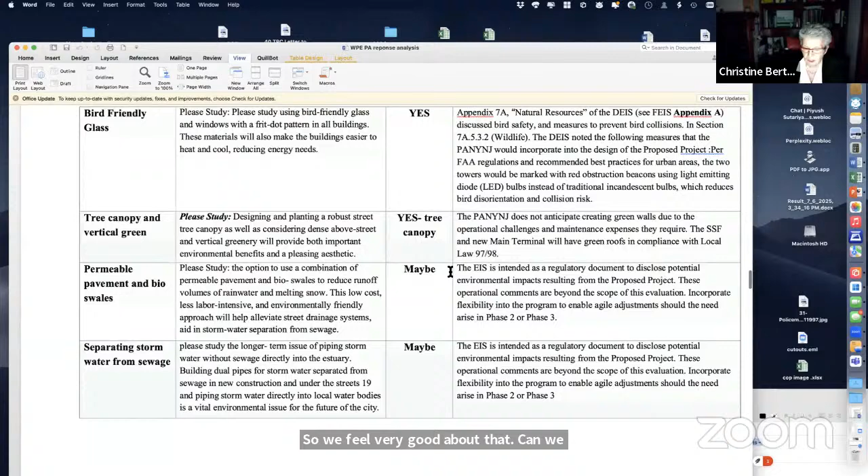Permeable pavement, again, it's a maybe. They said we'll look at it later. Separating stormwater from sewage, again, they said maybe, and later.

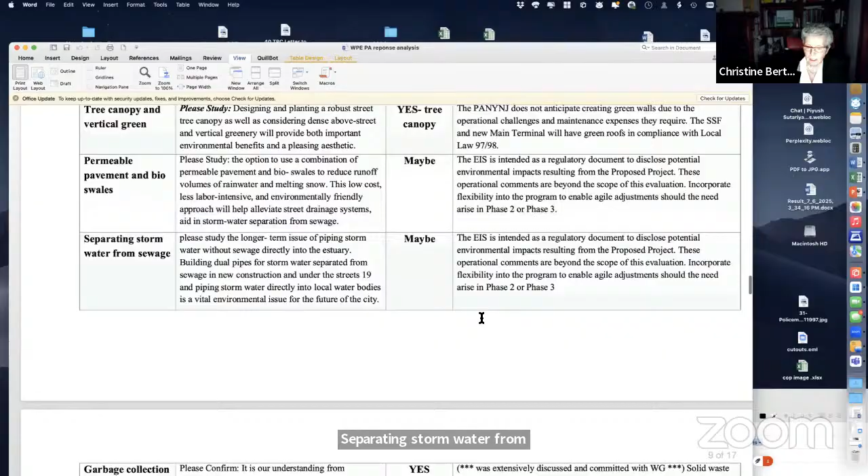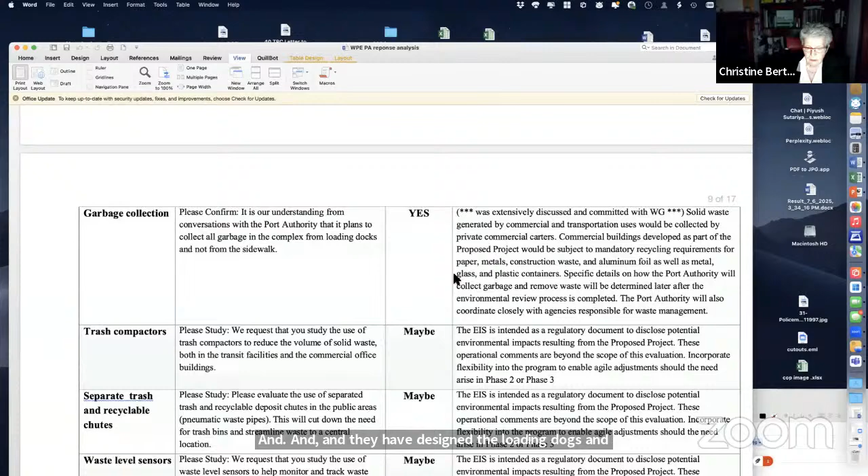Garbage collection, we have had a lot of discussion with them on the garbage collection. They have agreed to put all the garbage inside loading docks, and they have designed the loading docks and the facade to be able to do that.

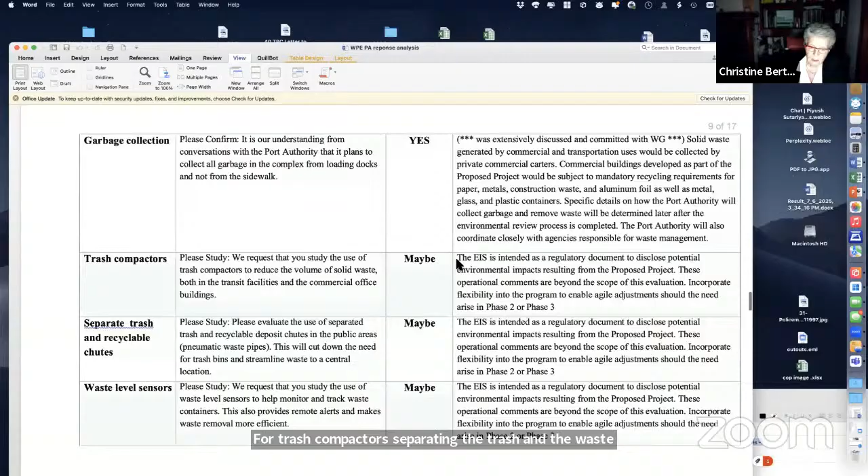For trash compactors, separating the trash and the waste level, I think that what they are saying is these are additional details that they want to discuss later. And so there is an opportunity to influence them now with those items.

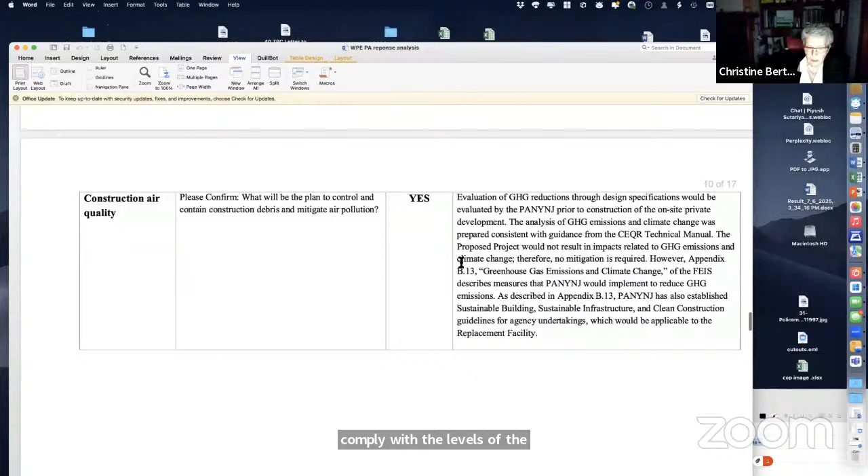Construction air quality, they will comply with the levels of the city and the CEQR manual, and so the answer is yes. And the vehicle idling, they will comply with limiting the vehicle idling within the plan.

So the second section is that in the DEIS response, we had a section where the MCB4 proposed initial list of mitigation and community benefits. That's a list which was voted by the whole CB4 at that time, okay? And now I'm going to take you through that, which sometimes is redundant, but it tells you what.

So agree to develop the open space, they said yes, and they will have a maintenance and operation agreement where they will assume a portion of the maintenance.

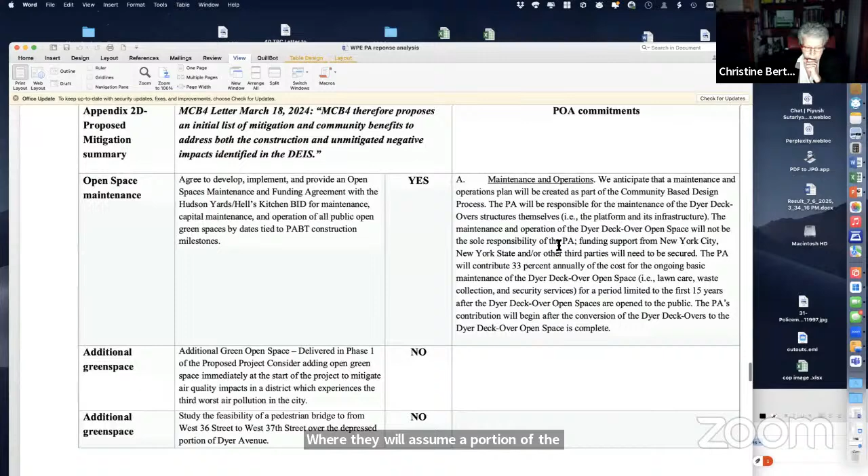Additional green space, we wanted more green space and they said no. That's the same thing, no. And no, section 3: they will replace the public open space known as Teresa Park.

They will replace that. They will not create a greenway path on West 36th Street. They consider that it's a DOT issue, but they will create a greenway path on the widened sidewalk on the north side of West 39th Street. And they have shown us the plan, and it's going to be very exciting.

Solar panels on the green roof. They said the roof of the project, to the greatest extent practicable after the mechanical, will be designed to accommodate solar panel and green roof. So I think it's a yes, and maybe we're going to have to push them to not only design the accommodation, but design a mixture of the implementation.

Water retention tanks, they said yes. They say we will incorporate the sustainability design standard, which exceeds the city department.

Staging decks to support the park, yes, they will have the decks. The community-based process, yes, they will do that. They are committed to that.

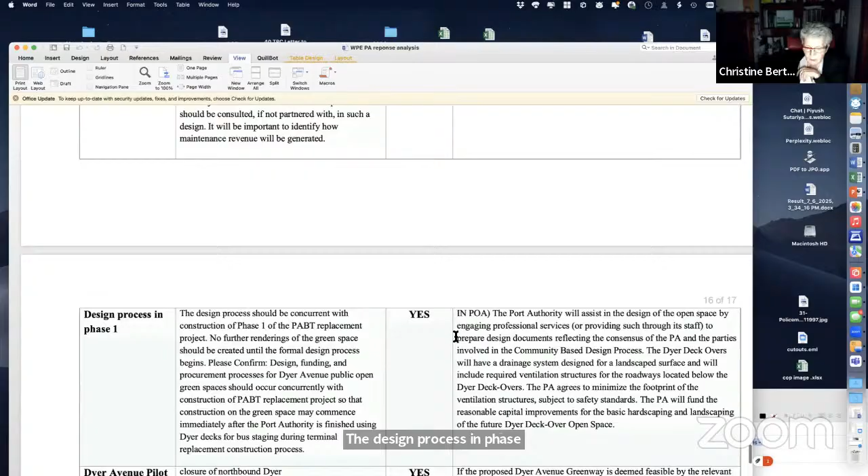The design process in phase 1, I mentioned that above. Yes, it will be done starting next year.

And they will do, and they have started, a Dyer Avenue pilot, which would allow to close a portion of Dyer Avenue in order to expand the amount of green space we could have between 34 and 37. So they have committed to do that with DOT, and they have started to do that.

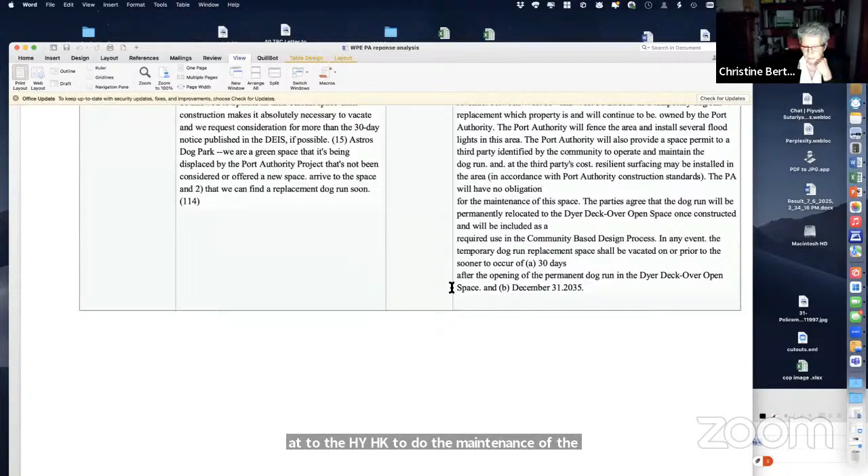And finally, they are committed to install, to build a dog run between 35 and 36. And they are looking at HYHK to do the maintenance of the space, but they will build the space. So that's that.

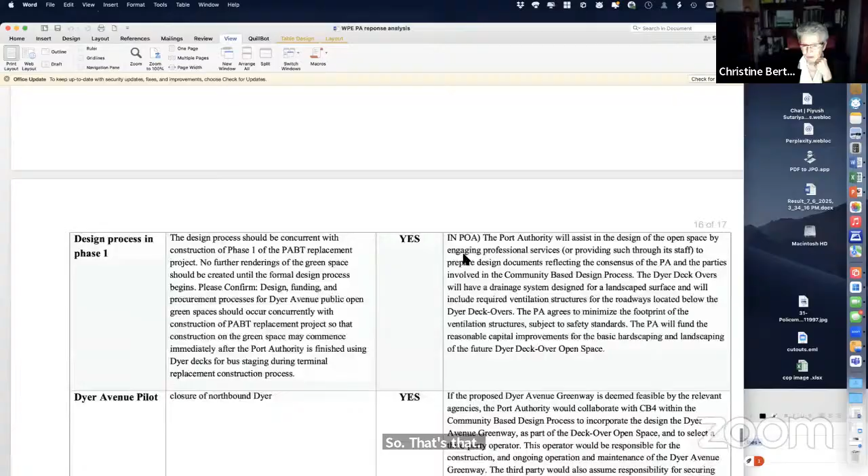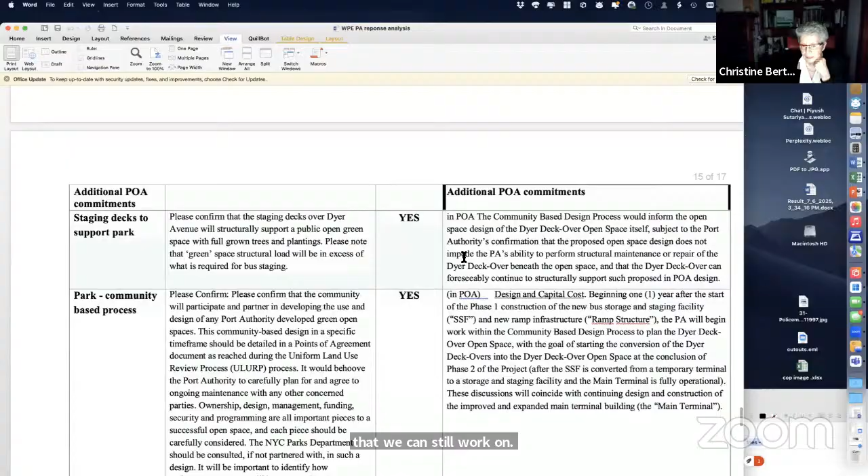I think if you look at the whole thing, I think we got a lot of things approved and a fair amount of things that we can still work on with different departments in the Port Authority. I definitely think that's a great job. I mean, listen, it's a big project. It's ongoing, it's live, it's moving, right?

So like you said, I think if there are some things that we were not happy with the response, there's time, I wouldn't say plenty of time, but there's definitely time to hopefully bring it up as a negotiating point again. Christine, would you agree? I think some of these things, yes.

The reason why we want to do this is because I know when Port Authority was here last time, some of the members were asking about, is there gonna be a bathroom? And if you do have a bathroom, you have to design the pipes there for, things like that, which are very good questions. So when we bring them back to the working group, they can kind of advocate for us as well, in those discussions.

But with those parks being a little bit of a separate issue, we will be involved in the design phase of those parks. Yeah, so definitely you will.

And then I think all the items which are more of an environmental nature, I think there is a very strong environmental division at PA, at Port Authority. Oh yeah, and I think you guys should invite them, pick one or two subjects where they said yes or maybe, and start discussing with them outside of the project what they plan to do and how they plan to do it, and kind of putting pressure on that group to become your advocate, our advocate inside the authority.